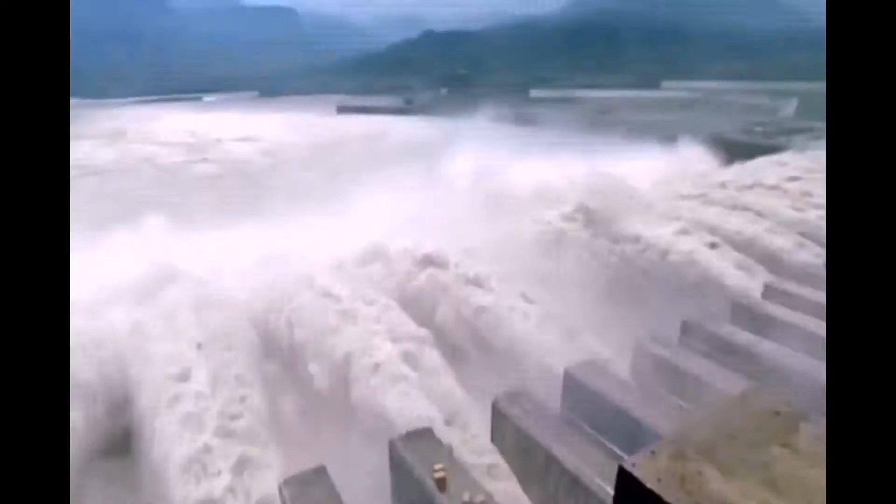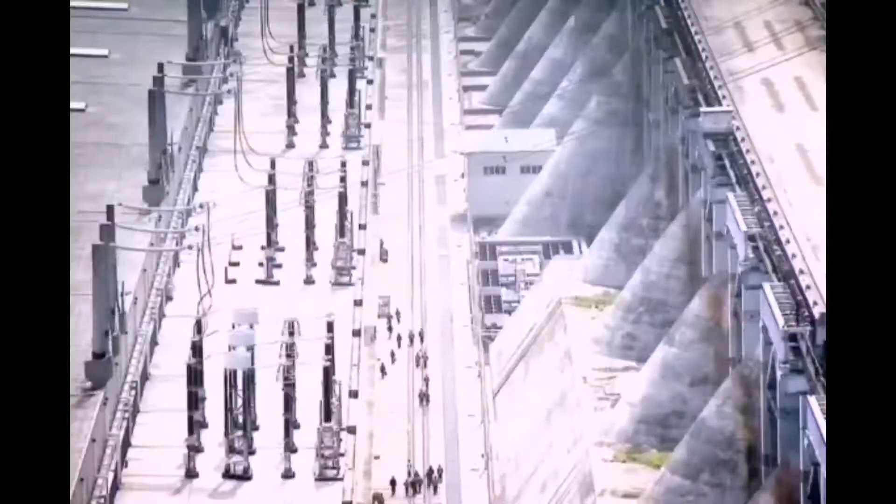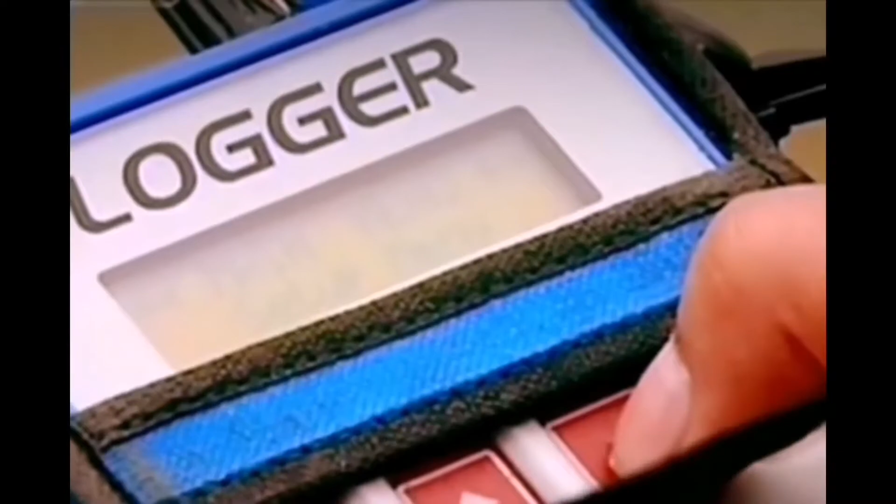There are many jaw-dropping structural feats around the world that have their own interesting engineering designs. But the one type of structure that would always leave us in great awe are dams. Their sheer dimension and immense capacity have this humbling effect on anyone that would come across this structure. It's literally like standing in front of a calm, reassuring giant staring at you in all its glory. And it goes without saying, dams are one of the most intricately designed structures in the world.

In today's video, we will be learning about dams. So hold your horses, everyone, because we're about to make you say, damn.

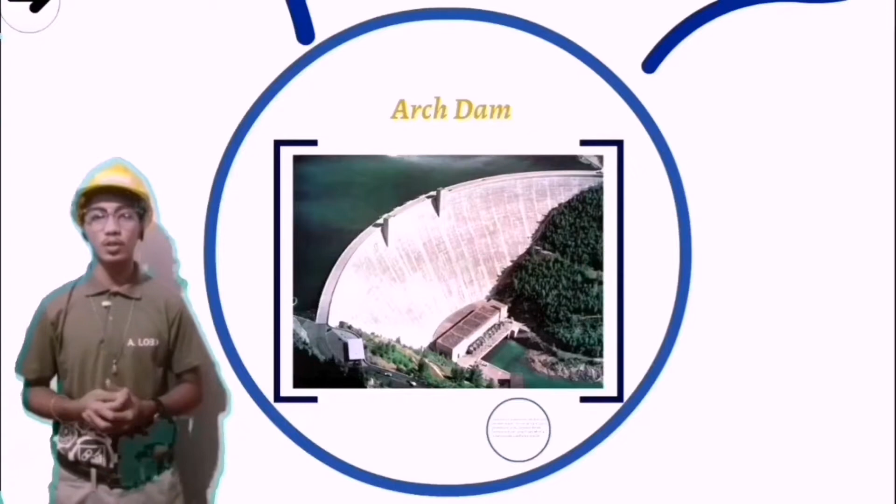I'm here to discuss the different types and characteristics of a dam. So let's start with an arch dam. An arch dam is a concrete or masonry dam which is curved upstream so as to transmit a major part of the water load to the abutments. This is a double curvature arch dam, an arch dam which is curved vertically as well as horizontally.

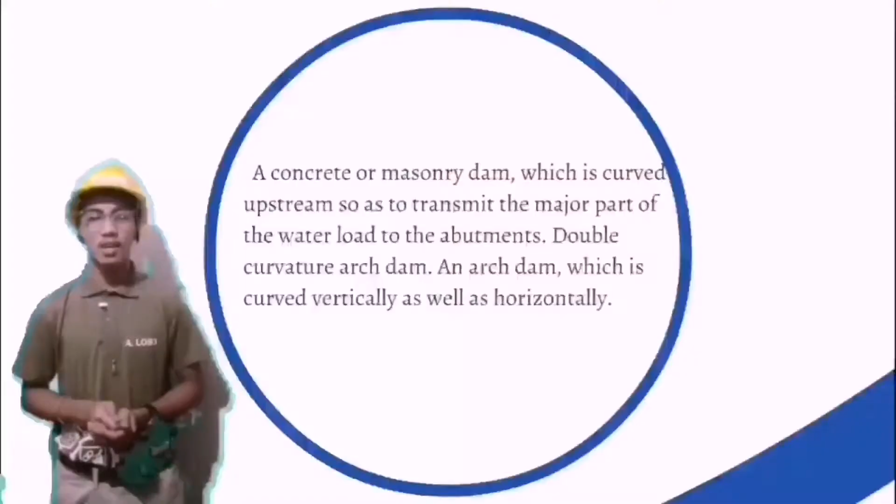The arch dam is designed so that the force of the water against it, known as hydrostatic pressure, presses against the arch, causing the arch to straighten slightly and strengthening the structure as it pushes into its foundation or abutments. San Roque Dam in the Philippines is one of the examples of it. It is the largest dam in the Philippines, and it is the 60th largest in the world. Wow, what a nice fact. The next one is the Buchanan Dam, in a census designated place or CDP in Llano County, Texas, United States.

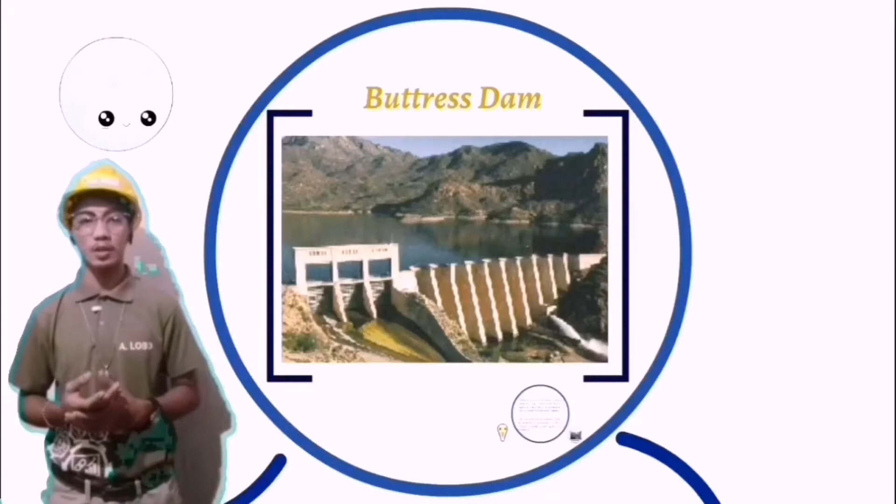The next one is a buttress dam. A buttress dam or hollow dam is a dam with a solid watertight upstream side that is supported at intervals on the downstream side by a series of buttresses or supports. The dam wall may be straight or curved. Most buttress dams are made of reinforced concrete and are heavy, pushing the dam into the ground. Water pushes against the dam, but the buttresses are inflexible and prevent the dam from falling over.

The best example of it is the Three Mile Falls Dam. It is a multiple arch and buttress dam, concrete dam and diversion dam that was completed in 1914. The project is located in Umatilla County, Oregon, USA.

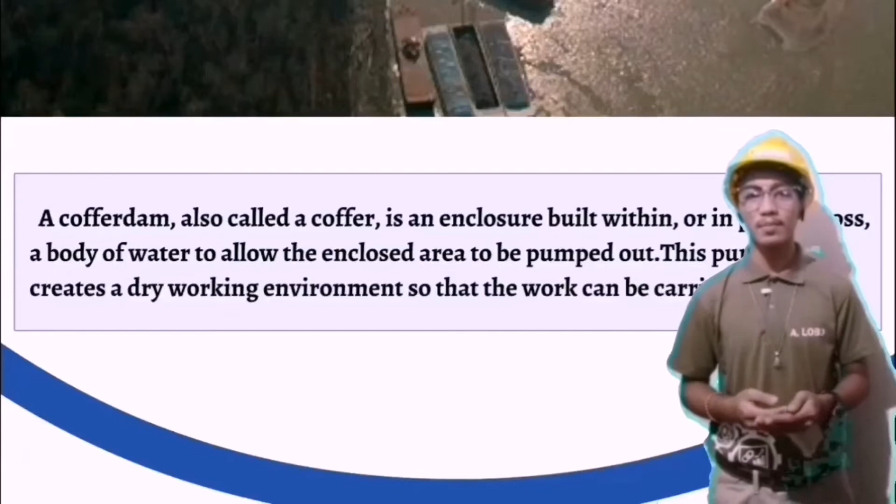The third one is the coffer dam. It is a type of dam that is a temporary structure enclosing all or part of the construction area so that the construction can proceed in the dry. A diversion coffer dam diverts a stream into a pipe, channel, tunnel or other watercourse. A coffer dam, also called a coffer, is an enclosure built within or in pairs across a body of water to allow the enclosed area to be pumped out. This pumping creates a dry working environment so that the work can be carried out safely.

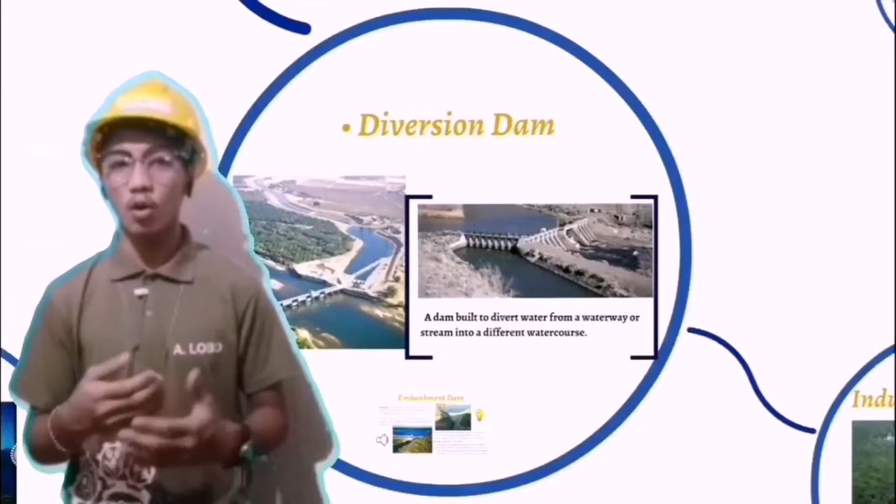Enclosed coffers are commonly used for construction or repair of permanent dams, oil platforms, bridge piers, and other structures built within or over the water. The next one is a diversion dam. It is a type of dam that is built to divert water from a waterway or stream into a different water course. A diversion dam is a dam that diverts all or a portion of the flow of a river from its natural course. Diversion dams do not generally impound water in a reservoir.

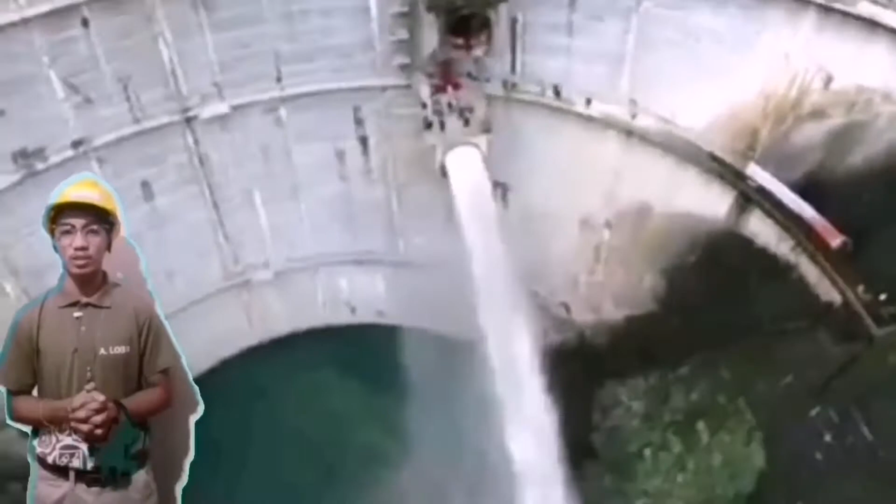Instead, the water is diverted into an artificial watercourse or canal, which may be used for irrigation or returned to the river after passing through hydroelectric generators, flow into a different river, or be itself dammed, forming an on-ground or groundwater reservoir or a storm drain.

Morelos Dam is a diversion dam that is located in northern Mexico. It is an example of it. And American Dam is a diversion dam also located in El Paso, Texas.

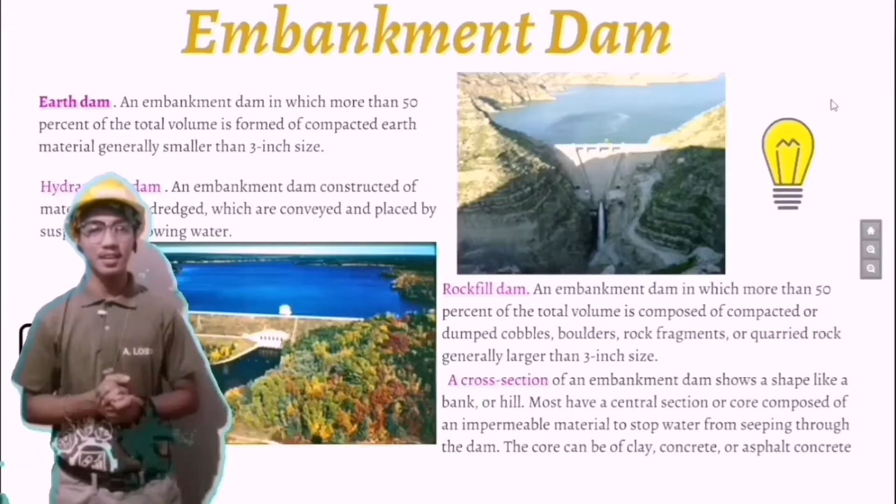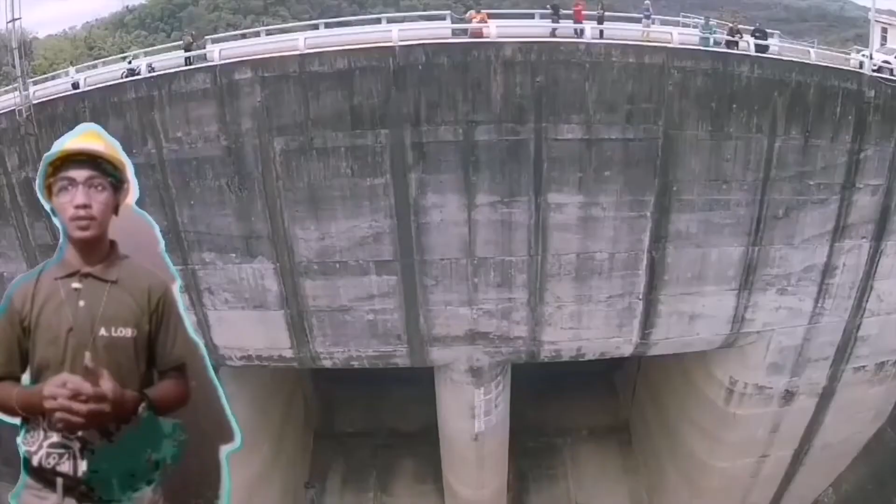So the next type of dam is an embankment dam. It is any dam constructed of excavated natural materials or industrial waste materials. There are three types of embankment dam: the earth dam, the hydraulic fill dam, and the rock fill dam. So let's go first with the earth dam. An earth dam is an embankment dam in which more than 50% of the total volume is formed of compacted earth material, generally smaller than 3-inch size.

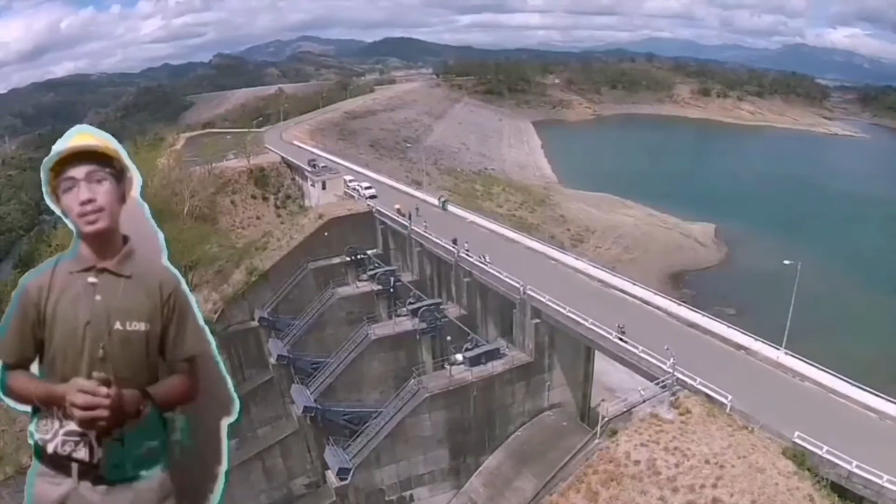So La Mesa Dam is an example of an earthfill dam. It is located at the Eco Park here in Quezon City. Pantabangan Dam is also an earthfill embankment dam on the Pampanga River, located in Pantabangan in Nueva Ecija, province of the Philippines. Pantabangan is a multi-purpose dam that provides water for irrigation and hydroelectric power generation, while its reservoir, Pantabangan Lake, affords flood control.

So the next is the hydraulic fill dam. It is an embankment dam constructed of materials, often dredged, which are conveyed and placed by suspension in flowing water. The last type of embankment dam is a rock fill dam. It is an embankment dam in which more than 50% of the total volume is composed of compacted or dumped cobbles, boulders, rock fragments, or quarried rock, generally larger than 3-inch size.

So the best example of a rock fill dam is the Magat Dam. Magat Dam is a large rock fill dam on the island of Luzon in the Philippines. This dam is on the Magat River, a major tributary of the Cagayan River. The construction of the dam started in 1975 and was completed in 1982. Magat Dam is one of the largest dams here in the Philippines.

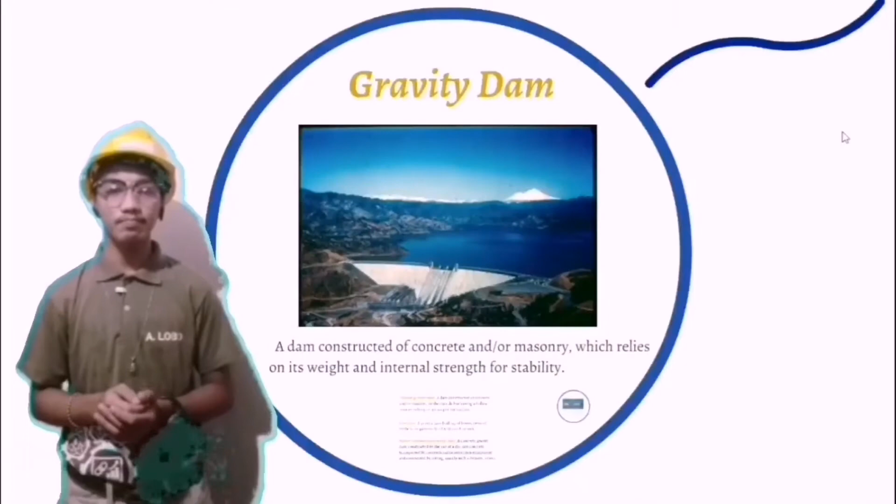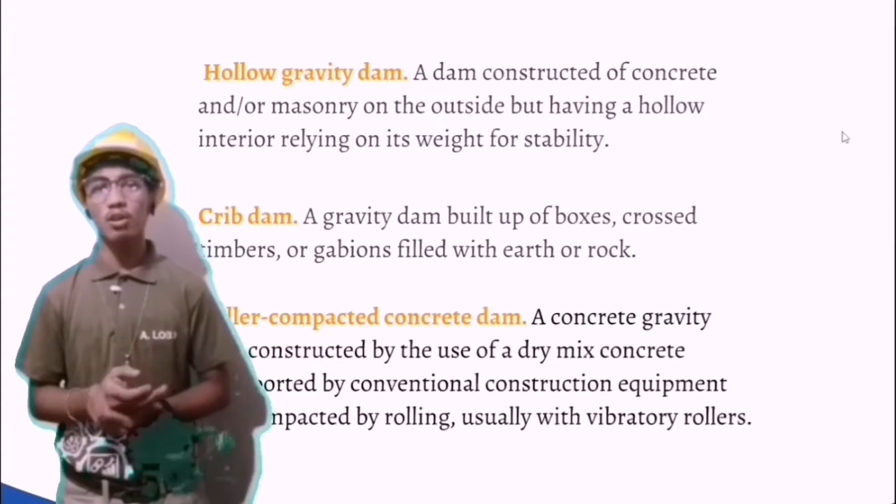The next type of dam is a gravity dam. A gravity dam is a dam constructed of concrete or masonry which relies on its weight and internal strength for stability. There is the hollow gravity dam, a dam constructed of concrete or masonry on the outside but having a hollow interior relying on its weight for stability. And the next type of gravity dam is a crib dam, a gravity dam built up of boxes, cross timbers, or gabions filled with earth or rock.

So the next type of gravity dam is a roller compacted concrete dam: a concrete gravity dam constructed by the use of a dry mixed concrete transported by conventional construction equipment and compacted by rolling, usually vibratory rollers. The best example of it is the Ipo Dam. The Ipo Dam is a gravity concrete dam located about 7.5 kilometers downstream of the Angat Dam, near its confluence with the Ipo River in Bulacan.

So Wawa Dam, also known as Montalban Dam, is also a gravity dam. It is constructed over the Marikina River in the municipality of Rodriguez in Rizal, province of the Philippines.

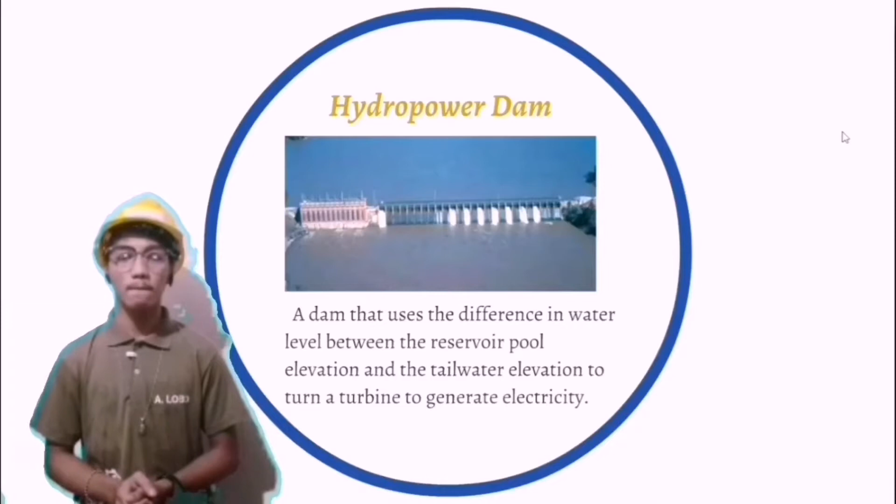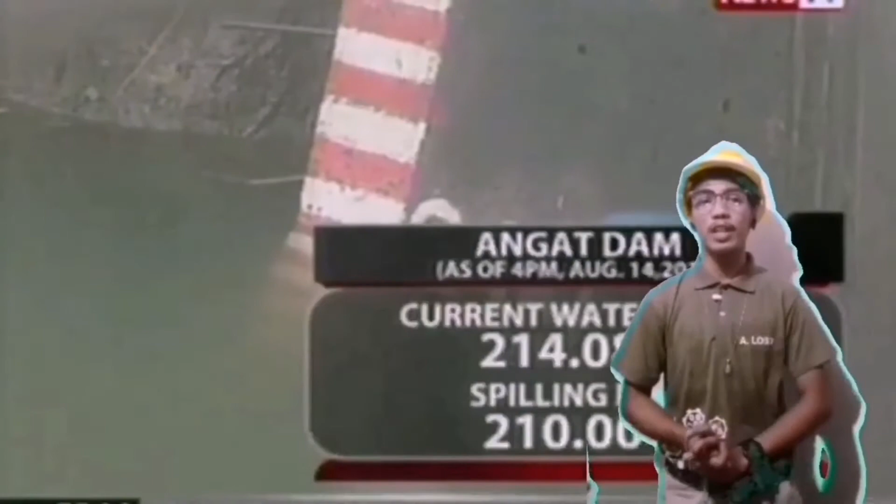The next type of dam is the hydropower dam. It is a dam that uses the difference in water level between the reservoir pool elevation and the tailwater elevation to turn a turbine to generate electricity. When a hydropower dam is used to generate electricity, the resulting energy is variously called hydroelectricity, hydropower energy, water power, or hydroelectric power. So there's a lot of powers. Hydropower dams provide an important source of renewable energy.

So powerful siya. So Angat Dam is the best example of it. It is a concrete water reservoir embankment hydroelectric dam that supplies Metro Manila and nearby provinces with water. It was part of the Angat-Ipo-La Mesa water system. Ambuklao Dam in Benguet is also an example of it. This dam supports a hydroelectric plant in the mountains of Bokod. It is among the first and largest hydroelectric power plants constructed in the Philippines.

Before we proceed to the next type of dam, we have here Mr. Joseph Gabertan to give us more information about the disadvantages and advantages of a dam. Mr. Joseph, are you there? Yes. Can you give us information about the disadvantages and advantages of a dam?

Some of the advantages of dams are the following. Water storage. It is the primary use of dams and reservoirs. It also ensures regular water supply. Thank you, Mr. Gabertan. So the next type of dam is an industrial waste dam.

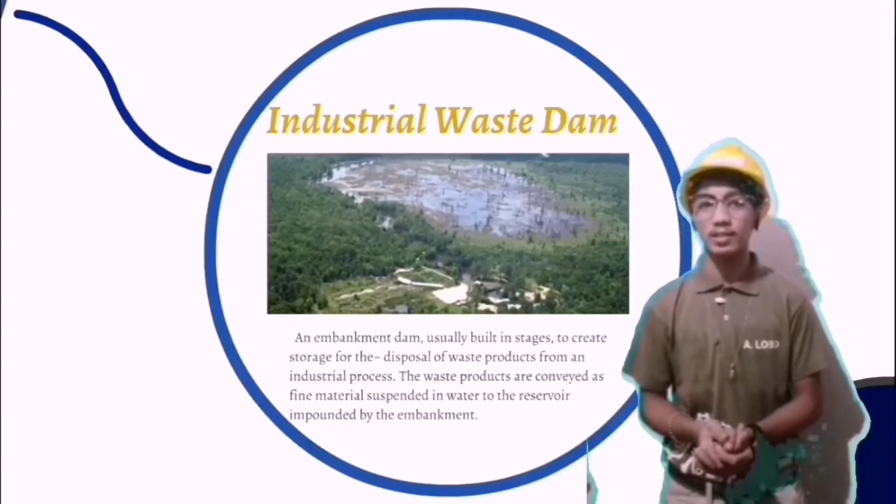So industrial waste dam is an embankment dam usually built in stages to create storage for the disposal of waste products from industrial process. The waste products are conveyed as fine materials suspended in water to the reservoir impounded by the embankment. So the embankment may be built of conventional materials but sometimes incorporate suitable waste products.

Mine tailing dams are an industrial waste dam in which the waste materials come from mining operations or mining processing. So Tarbela Dam in Pakistan is the largest earth-filled dam in the world. The next type of dam is a masonry dam.

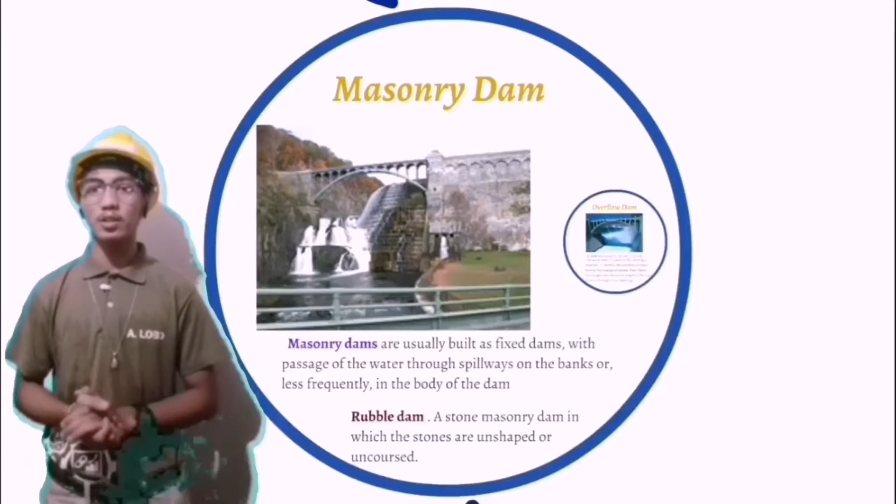So any dam constructed mainly of stone, brick, concrete blocks joined with mortar. A dam having only a masonry facing should not be referred to as masonry dam. A rubble dam is a stone masonry dam in which the stones are unshaped or uncoursed.

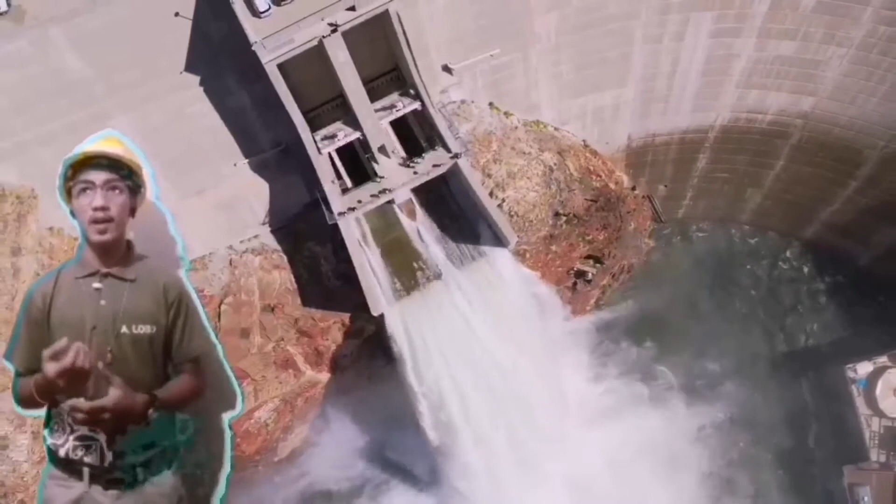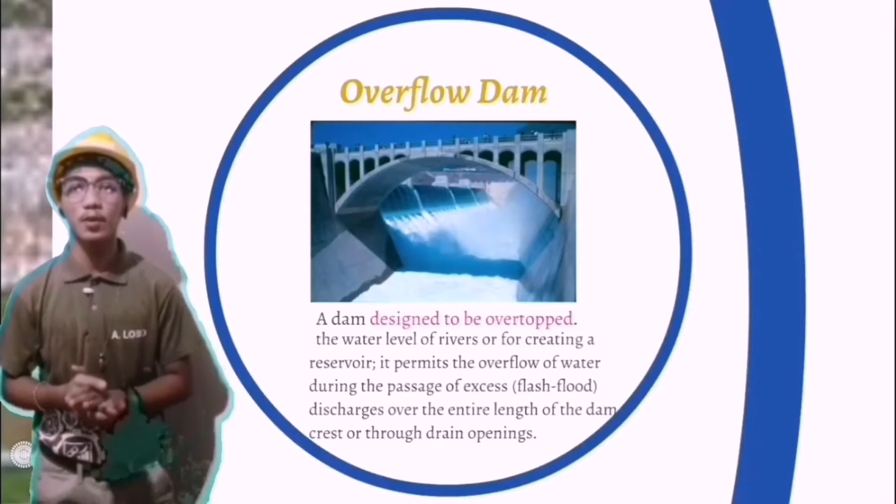The next type of a dam is an overflow dam. So this type of dam is designed to be overtopped. It is also designed for raising the water level of rivers or creating a reservoir. It permits the overflow of the water during the passage of excess or during the flash flood.

Discharges over the entire length of the dam crest, or through drain openings. So the operation of the drain openings is regulated by gates depending on the quantity of the discharge and water level in front of the dam.

So a spillway is a structure used to provide the controlled release of flows from a dam or levee into a downstream area, typically the river bed of the dammed river itself. In the United Kingdom, they may be known as overflow channels. Spillways ensure that the water does not overflow and damage or destroy the dam. So, the chute spillway of Llyn Brianne Dam in Wales is the example of it.

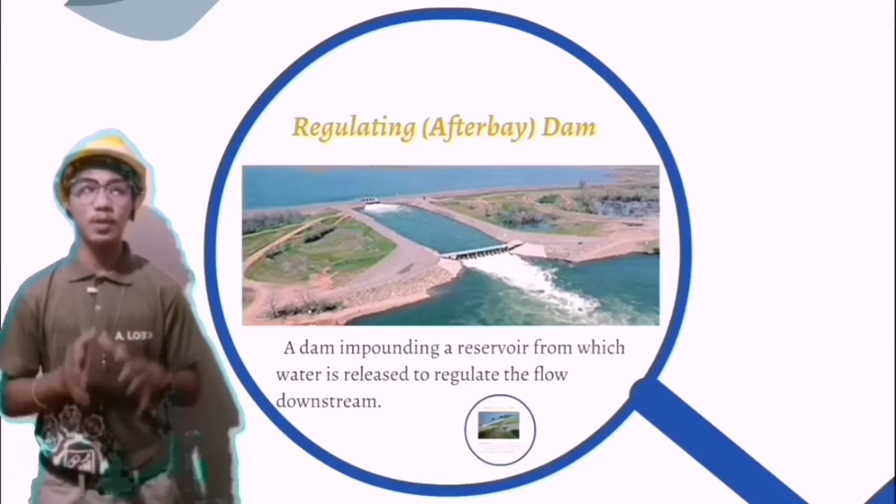So, the next type of dam is a regulating or afterbay dam. So, it is a dam impounding a reservoir from which water is released to regulate the flow downstream. So the best example of it here in the Philippines is the Bustos Dam, also known as Angat Afterbay Regulator Dam. It is a small irrigation dam at Bustos, Bulacan, often mistaken by the locals as Angat Dam since it is located close to the nearby town of Angat.

The other example of it is the Yellowtail Dam. It is a dam across the Bighorn River in south central Montana in the United States.

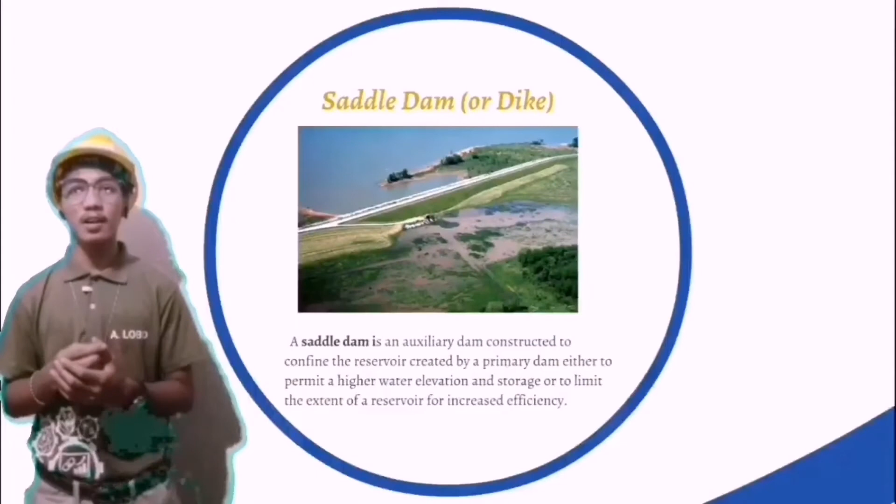So the next type of dam is a saddle dam or dike. It is a subsidiary dam of any type constructed across a saddle or low point on the perimeter of a reservoir. So a saddle dam is an auxiliary dam constructed to confine the reservoir created by a primary dam either to permit a higher water elevation and storage or to limit the extent of a reservoir for increased efficiency. So an auxiliary dam is constructed in a low spot or saddle through which the reservoir would otherwise escape.